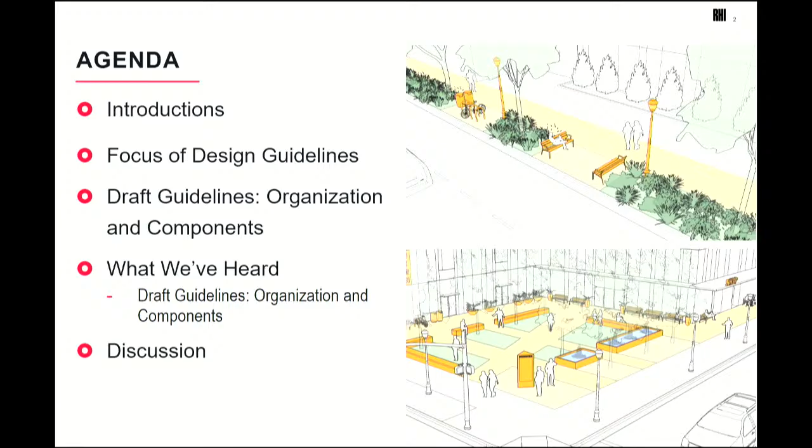We have some exciting news to share with you on the guidelines. We're going to share with you the focus of the guidelines that we have already shared with you, how we have heard from the community, what we have heard from the community, how we have taken that and created the guidelines based on what we have heard. And then finally, we will open up for discussions.

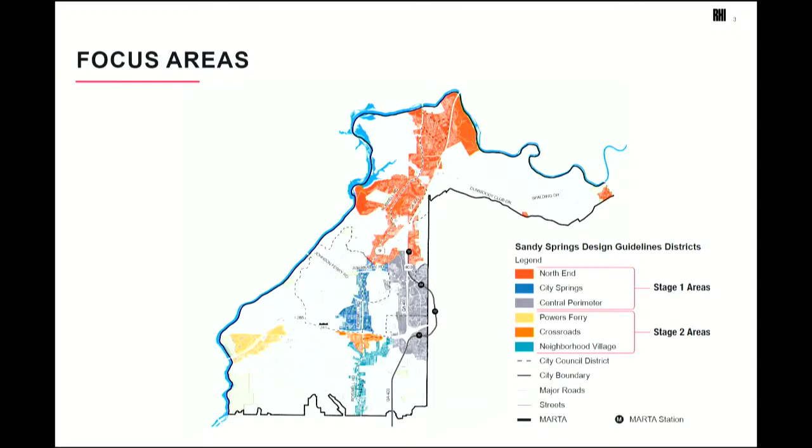As you already know, the guidelines are for the commercial districts. Those are going to be applied not only at the commercial districts, but also the apartments, the multifamily areas, and the townhomes. These are the areas where the guidelines are going to be applied for development and redevelopment. This is advisory in nature. All of the areas in color that you can see here are where the guidelines will be applied, starting from North End, City Springs, Greater Central Perimeter, Crossroads, Neighborhood Village, and Powers Ferry to the west. We are towards the end of the process.

We had gone through a year-long process, and I'm happy to share that we have a draft document that is going to be uploaded to the website, and you will probably see that tomorrow morning. That draft guidelines document is going to be up there for a month for public review, up till May 15th, 2026. While we are going through that public review, we are also tweaking some of the things within the guidelines based on the discussions with the staff.

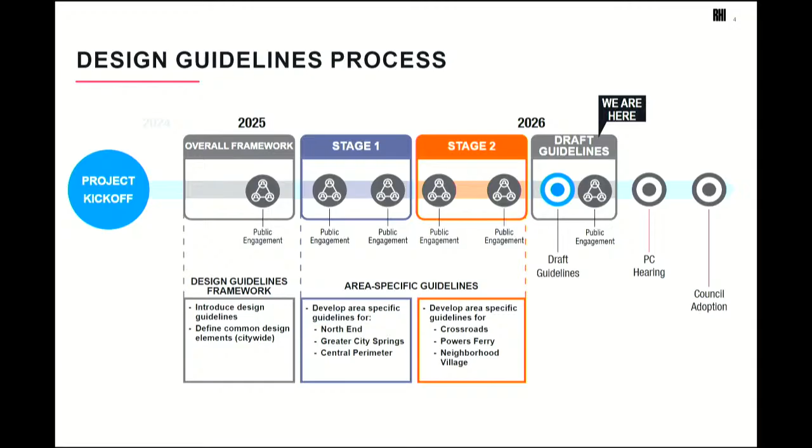We have gone through a lot of public process. These are some of the listing of that. We started with the mayor and the council back in 2024, end of 2024, early 2025. We had a lot of stakeholder meetings. We met with neighborhood residents, the business owners, the developers, the real estate folks, design folks, architects, landscape architects, you name it, we have met with a lot of those folks.

With regards to the public meetings, we had gone through 5 rounds of public meetings. For each round, we had a public meeting, followed by a survey, and in some cases, there were pop-ups. The final public meeting is going to be 2 days from tonight, that is on Thursday, and we'll be uploading all of the materials from the public meeting. Whoever is not going to be able to attend that public meeting, they will be able to view that online.

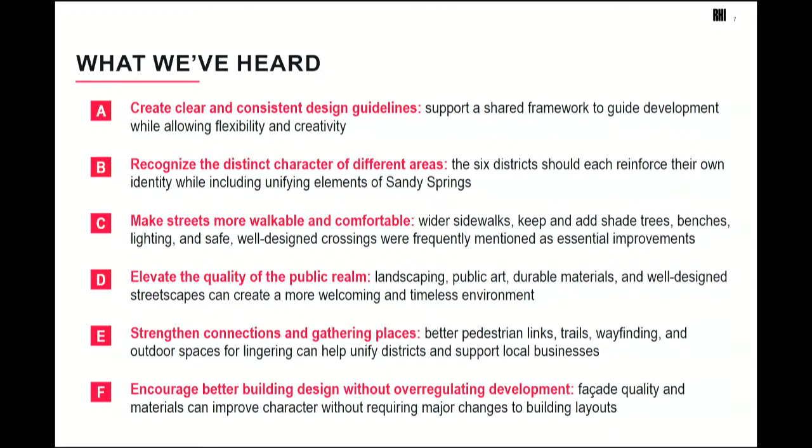So this is an encapsulation of what we have heard so far. Ideally, I would like to organize that into the first 2 which are kind of the overall framework, which is creating consistent and clear guidelines. We have heard from the mayor and the council early on that the guidelines have to be flexible, adaptable, so that the developers and the property owners have a chance to express themselves within their own property. But the public realm is the one that starts to unify everything within the different districts. The numbers, the alphabet C through E, is all about public realm and the horizontal surfaces, and F is about better building design without over-regulating development.

You have seen the overall framework. We have a lot of different character in the different districts. Whether it's the North End, it's more parkway-like, there's a lot of tree canopy. City Springs, where we are, we know this is the heart of the city, the core of the city. There is a specific character to the city. If you go to Perimeter, wider infrastructure, taller buildings, glass.

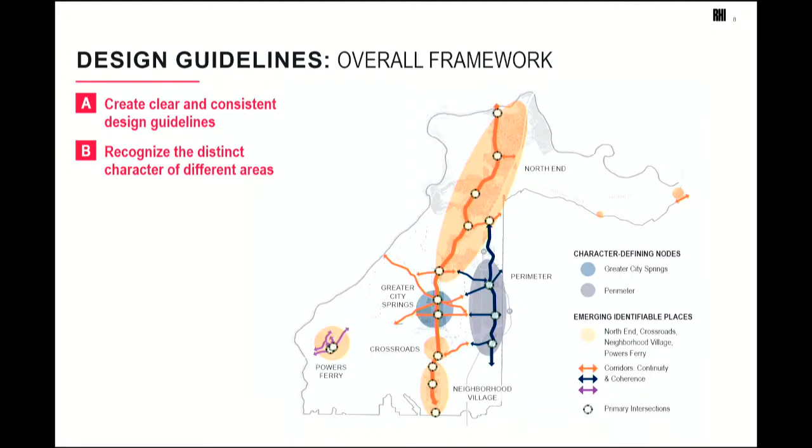On the south side of 285, it's more urban - Crossroads, Neighborhood Village, and Powers Ferry. While there are distinct differences between the districts, we're looking at how to connect them through corridors like Roswell Road and Peachtree Dunwoody, and what elements we can promote there. Also the east-west routes - Johnson Ferry, Mount Vernon, Hammond, Glenridge Connector - what elements can we implement through development and redevelopment that start to unify the different districts of the city?

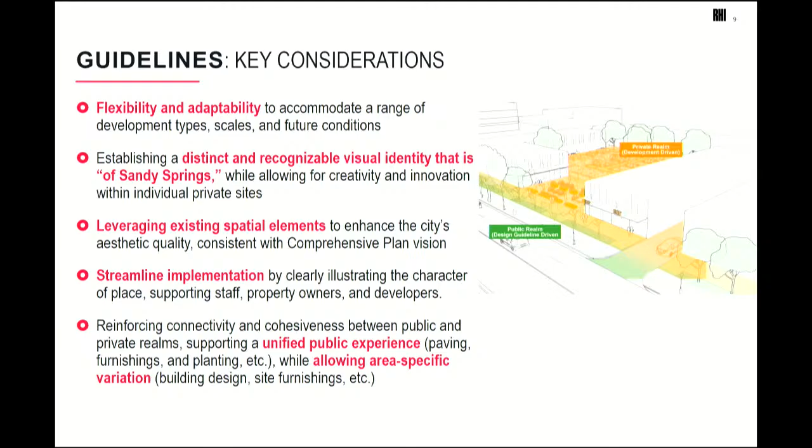I don't want to go into the details of the key considerations, it's just similar elements of what we've heard. The main thing is flexibility and adaptability of the code. The other thing we've heard loud and clear is the term of Sandy Springs - we're not trying to promote something through the design guidelines that isn't already here. We're trying to understand the specific character of the different districts and emphasize and highlight those through the design guidelines, creating a bridge between the overall vision of the comp plan and the different character areas, connecting it with the legal requirements of the development code.

There are many diagrams like this throughout the guidelines - how to make streets more comfortable, what different amenities you can include. It's very visual, very graphic, so that somebody from the city side or the applicant side, when they see these images throughout the document, they'll start to get an idea about the character of the different places.

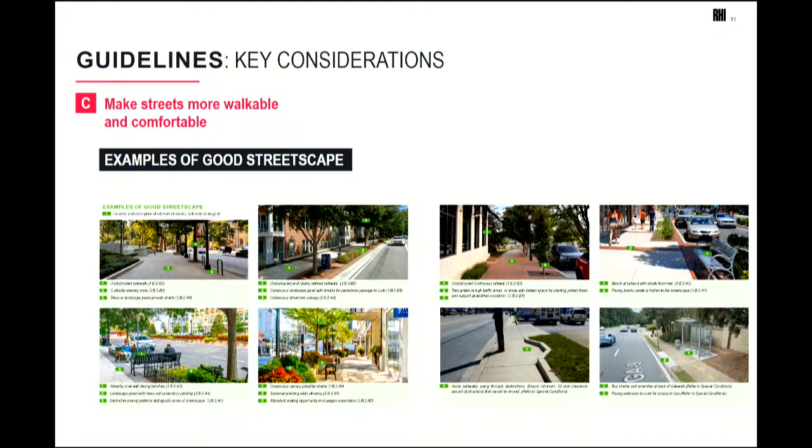This happens to be about the streetscape. There are furnishings, and they're laid out and organized through the different districts - City Springs, Central Perimeter, North End, Neighborhood Village, Crossroads, and Powers Ferry. The furnishings include benches, trash cans, bike racks, planters, lighting, and other elements.

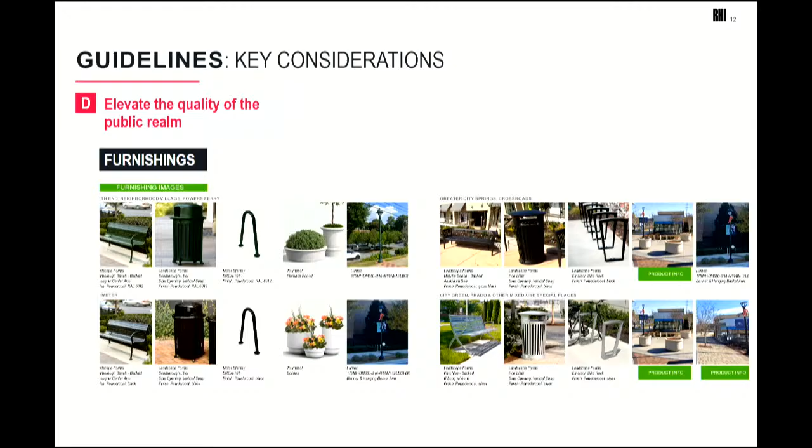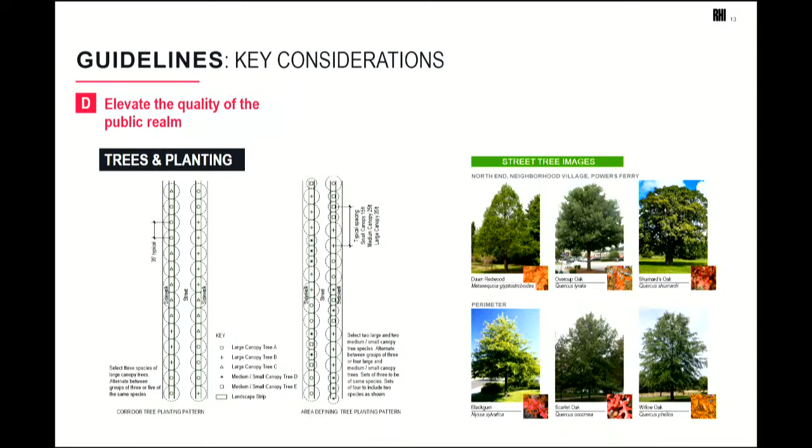Trees became a big part of the discussion with the public - everybody wanted to see more tree canopy. We just had a discussion about the tree canopy. There's a lot of guidelines regarding the spacing of trees, the clustering of trees, the types of trees, and there's a correlation between these guidelines and the technical manual, which has a lot of guidance regarding trees.

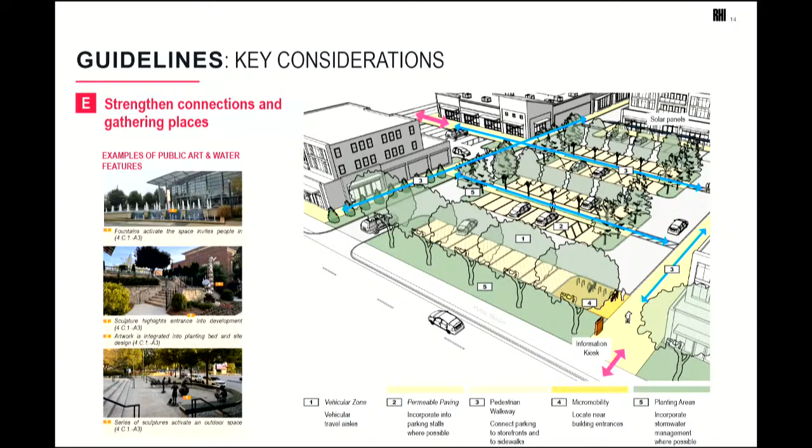Strengthening connections and creating better gathering places - we have City Green as a great example, and Veterans Park on the other side of Roswell Road. How can we create better places within the city, understanding those specific mixed-use areas and incorporating special places? What are the different elements to make those special places? How can we connect safely from door to door, from destination to destination?

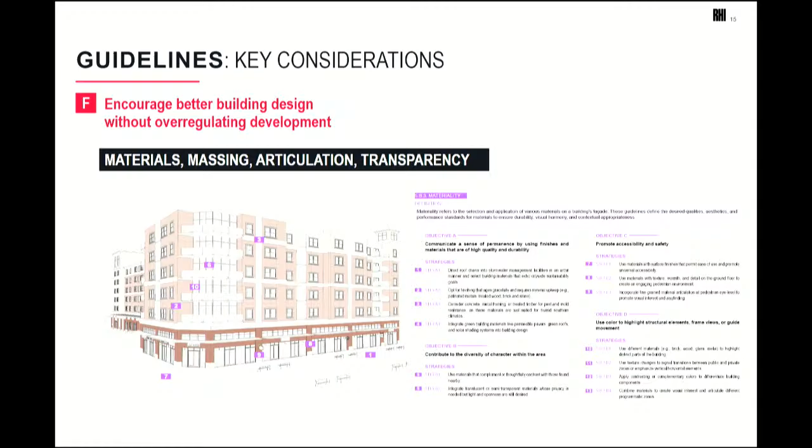On the building side, we're talking about materials, the massing of the buildings, the articulation, transparency. It's all about creating features with shades and shadows so there's interest in the building - somebody coming in, just like the building we're in right now, is a great example for the city. We probably won't like any kind of flat facade, or anything with just one material. What are the materials - brick and glass and all of those scenarios? There are specific guidelines and strategies related to that.

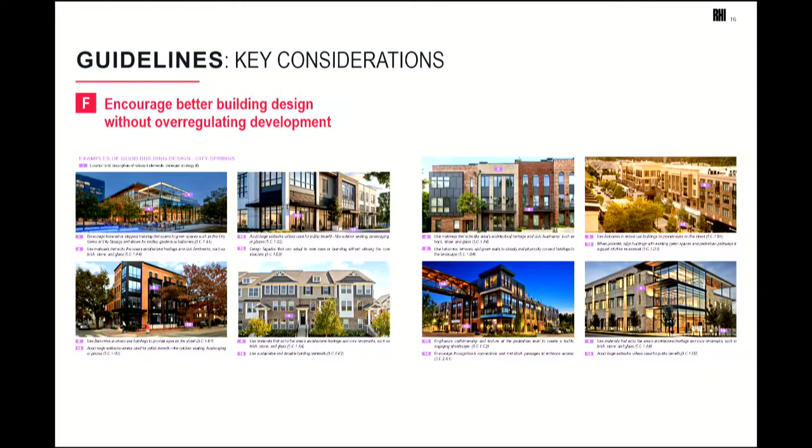Again, on the building side, there are a lot of images like this which show the character for each of those districts. All of these images are carefully curated based on the feedback we received not only from all of you, but also from the public - what are the most liked images? Within each of those images, there are specific strategies embedded. It's not only the image that has to be replicated - it's what element of that image you can identify that would create a better character for a place and a building.

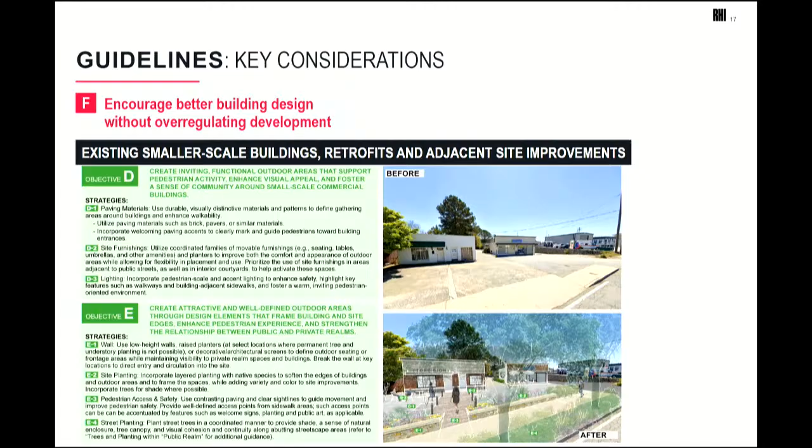We also have a section - you don't have to read it - on existing smaller scale buildings, retrofits, and adjacent site improvements. We know that not all of the guidelines are going to be applicable to bigger redevelopments and developments. We also want to make sure the design guidelines can be applicable to smaller retrofits.

And finally, the implementation section. We're in discussion with the city, and based on city staff and those discussions, we also have a chapter regarding the implementation of how it can be helpful to the development. I organized that into two different buckets - one is sharing clear expectations through the guidelines. The legal document is the development code, and there's a lot of written text and narrative.

How you can graphically show that as part of the design guidelines is going to be important, and how you can use that in the pre-application stage when somebody is thinking about a specific development. They can start to use that just like what they can use for the zoning code or the development code and the comprehensive plan.

It helps in guiding rezonings and other plan developments, and helps give you the information so you can make informed decisions as far as approving or creating new development. As I mentioned before, you already have an OSI standard, Outdoor Amenity Space Improvement Standards, I think section 6 in the development code. The design guidelines are kind of a graphical representation of some of the OSI standards, and help create a very clear picture to the applicant of what the written words mean.

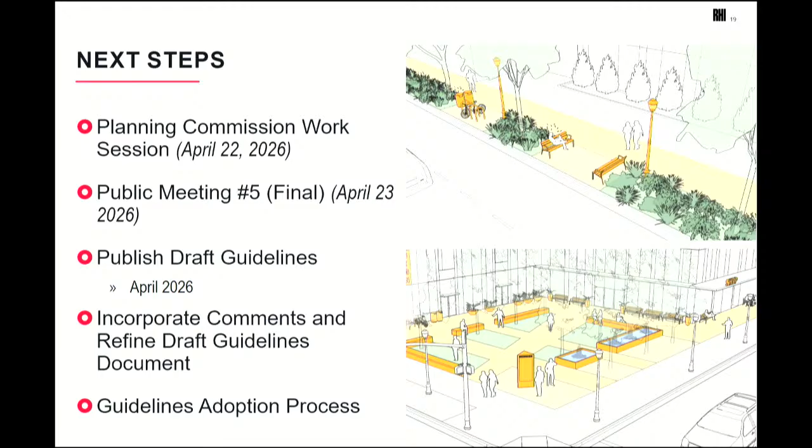And finally, the next steps: we are giving the same presentation to the Planning Commission tomorrow as a work session. Public meeting number 5 is April 23rd, which is Thursday. The draft guidelines will be up on the website, like I mentioned before. After a month's public review, as we're tweaking the whole guidelines document, we'll refine it and bring it back for the hearing process with the Planning Commission and the Mayor and Council.

And you can go to spr.gs/design to see the document. All of the documents from the public meetings are up there on the website.

Questions? Any questions? Dr. Kelly.

Okay, well, I'll start here. Looking at your next steps, what I'd like to understand is at what point will this body decide the posture we want to take with these design guidelines? I know we kind of talk about it, and I have a sense of where we are, but I don't think we've officially decided, more formally. Does that happen sometime after the adoption or before the adoption?

That may be more of a staff question. So from the approach, as he mentioned, we really are going toward more flexibility here, less on the requirement side. So that's something I would love feedback from council as you all review the draft, come to the public meeting, take a look at that, and if there are areas where you think we actually should be requiring this or changing some things in the code related to this—we as staff are going through that same exercise now, and we'll be making determinations about what really should go in the code. But it would be helpful to hear from you all if there are certain things you prioritize that you think should be a higher priority from an implementation standpoint.

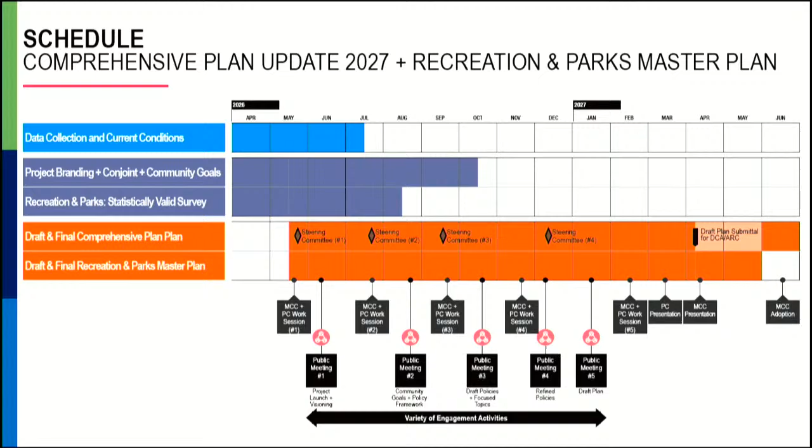Do we have any public comment? We'll close the public comment period. You've heard the report of the Planning and Zoning Manager. What's the desire of council? No action is needed. I'm sorry, it's a public hearing. Do we need to do anything? No. Thank you. Thank you so much.

Moving to new business, will the clerk please read the first item? This is agenda item number 2026-099, consideration of a resolution to appoint members to the Sandy Springs Comprehensive Plan Advisory Committee, presented by Mayor Rusty Paul.

One of the things that we do as part of the comprehensive plan process is have a Citizens Advisory Committee to serve as a focus group that the consultant can work with to bounce ideas and get feedback. It's in no way intended to replace public comments and public access to the process. This group will meet with the consultant four, five, six times over the course of the planning process just to provide feedback and ideas.

In putting this together, there are a lot of people who want to serve, way more than we can ever appoint. Historically, we've put about 12 to 14 people on this group representing a broad spectrum of the community, and that's what I tried to do. We have hundreds of people willing to serve, so in paring this list down to a manageable group, I've tried to look at people who have a couple of characteristics.